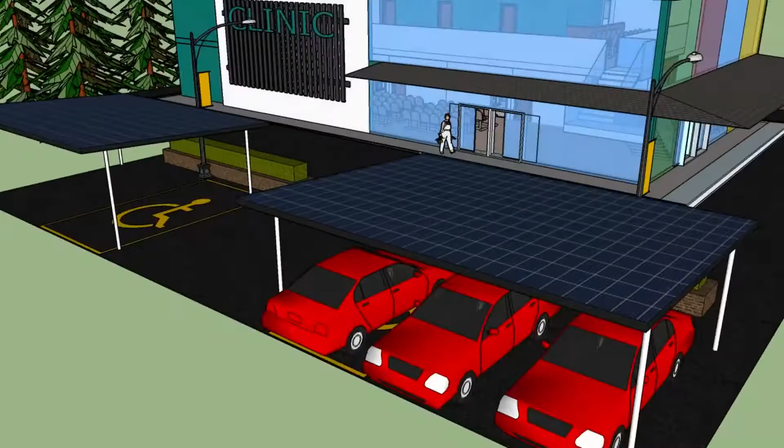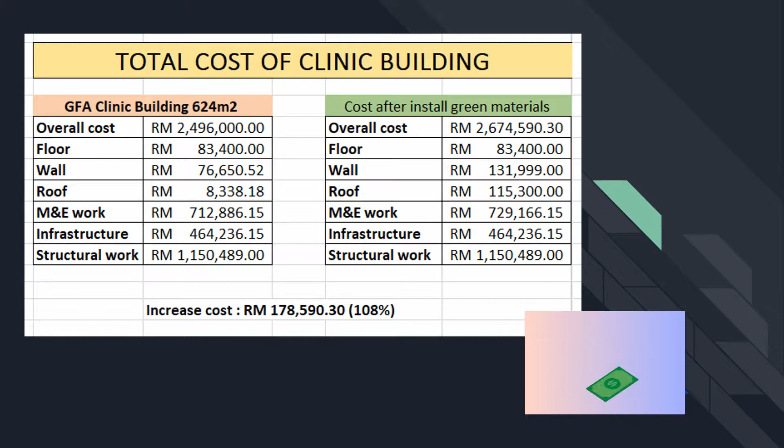The overall cost for our design building is RM 2.496 million. The cost we get is based on Arcadis 2019, where the range cost per meter squared is multiplied by the GFA. Hence, the range cost per meter squared we use is 4,000 ringgit, then multiplied by the GFA, which is 624 meter squared.

The cost will then be distributed to building elements such as floor, wall, roof, M&E works, infrastructure, and structural work. As we can see, the cost of the installed green materials will increase the overall cost. In our building, the overall cost of the installed green material is 2,674,590 cents. The elements that increase the cost are the wall element, roof element, and M&E work.

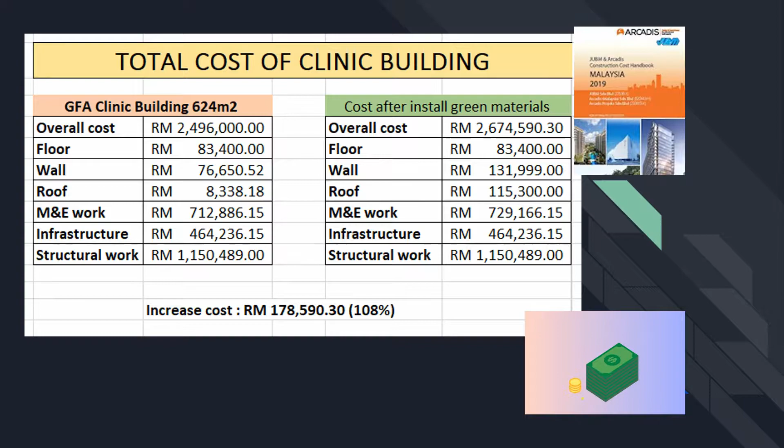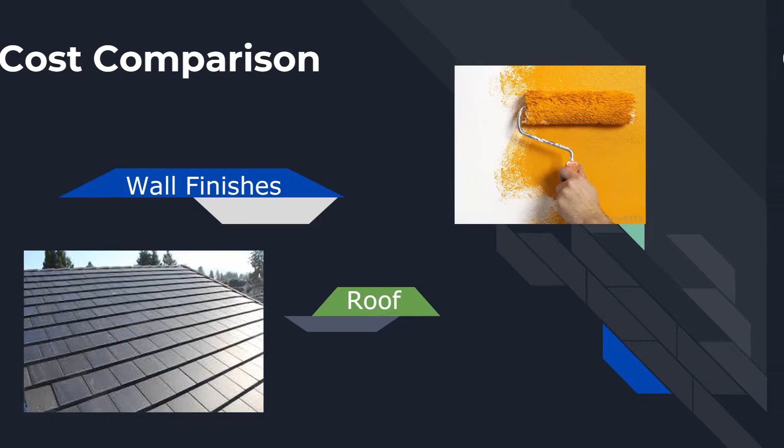We install green materials such as tubular skylight, solar panel, rainwater harvesting system, colored glass wall, low VOC painting for wall, clay brick for wall, exhaust fan for toilet, and sensor lighting. There are a few elements that we compare to make a cost comparison with the previous conventional clinic design, such as wall finishes, roof, glass wall, exhaust fan, tubular skylight, rainwater harvesting system, and bricks.

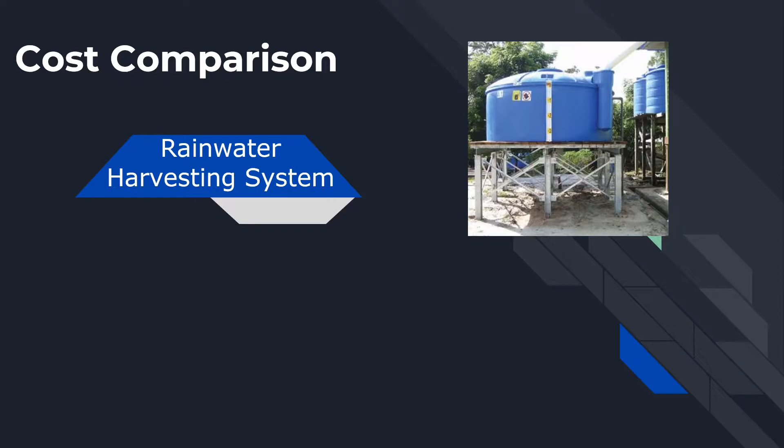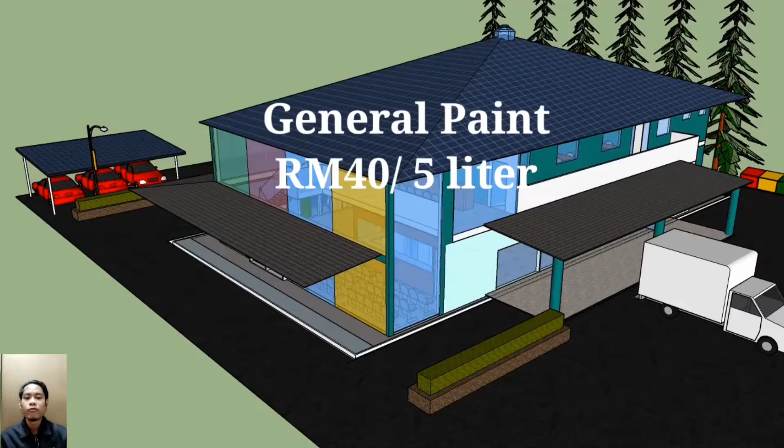Before this building converted to a green building, the finish for the wall was paint. Basically, the paint is a general paint in the market, which is for a general building. The price is RM 40 per 5 liters. For painting this building, we need to use about 140 liters, which is about RM

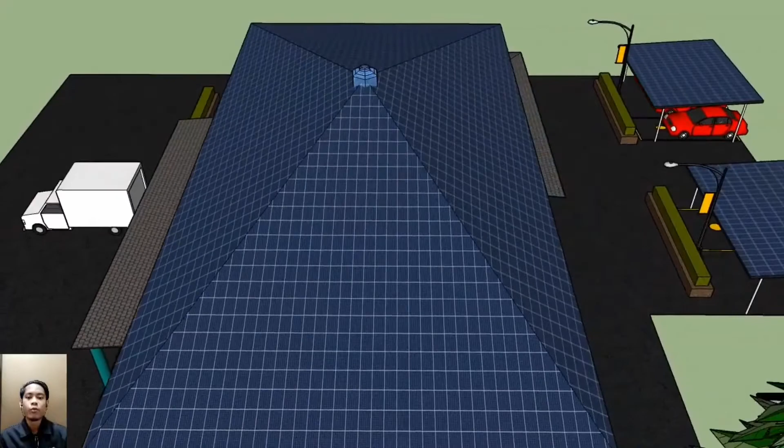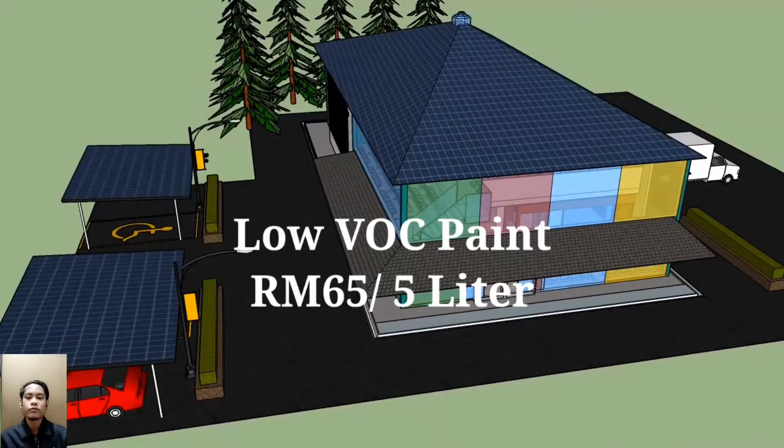1,120. When the building converts to green, the paint we use is low VOC paint, which is more expensive than general paint. The price is RM 65 per 5 liters. The total price for painting this building using low VOC paint is RM 1,820. The price difference is about RM 700 to convert the paint to a greener one.

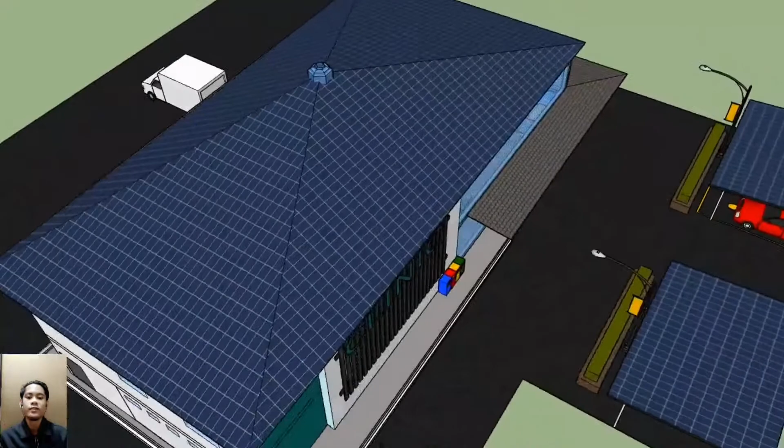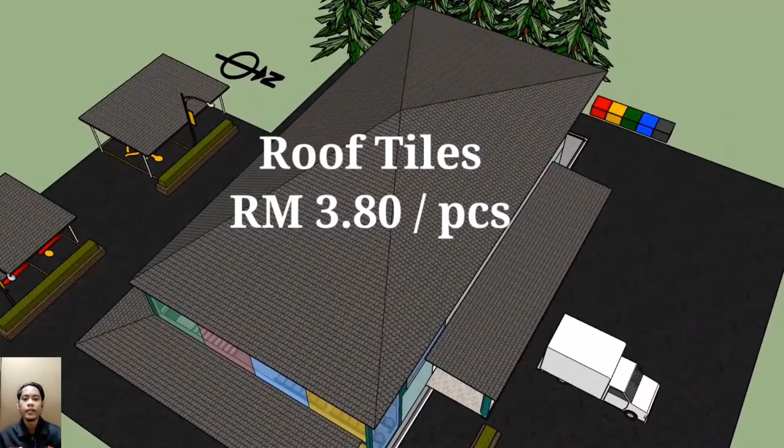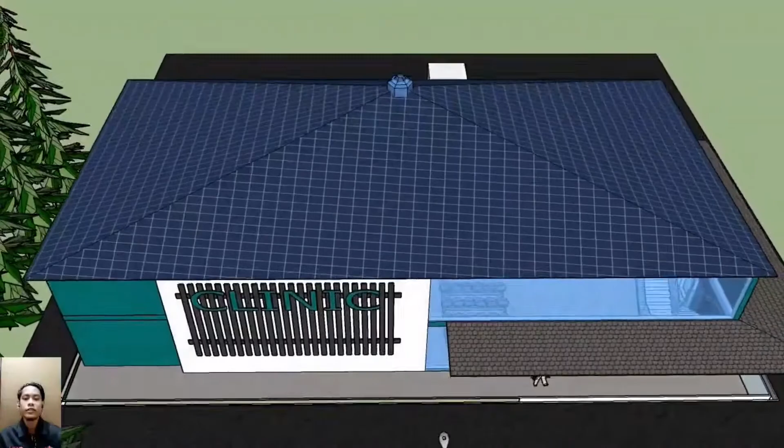The roof finish for this building uses roof tiles. The price for the tiles is RM 3.80 per piece with size 472 times 303 millimeter, which is about 11 pieces to cover a 1 meter square area. The roof size for this building is about 446 meter square. So it takes about RM 18,642 to install all the roof.

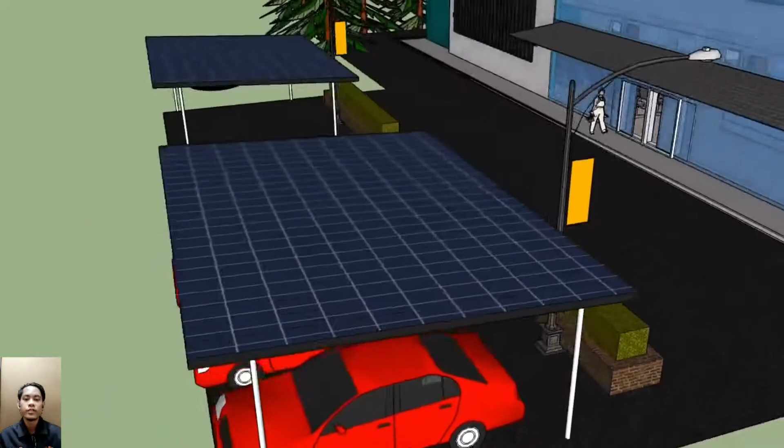When the building converts to a green building, we use solar panels as the roof finish. The cost for the solar panels as a roof finish is about RM 56,900, including batteries, wires, and inverter.

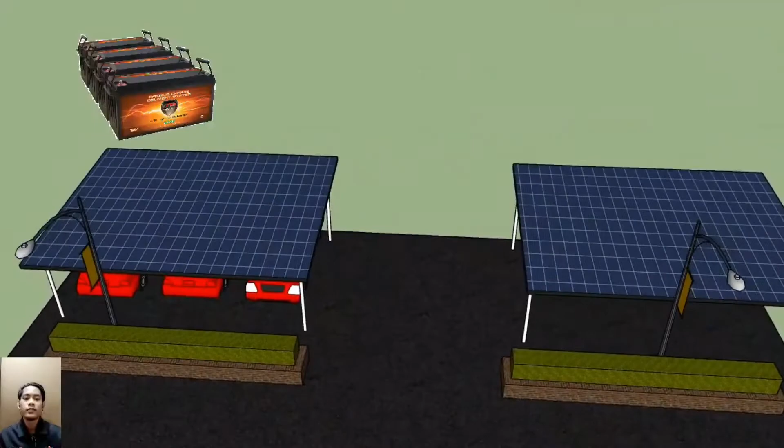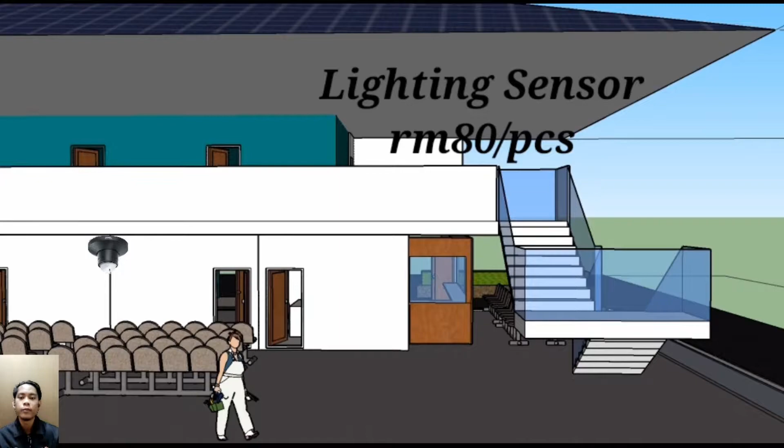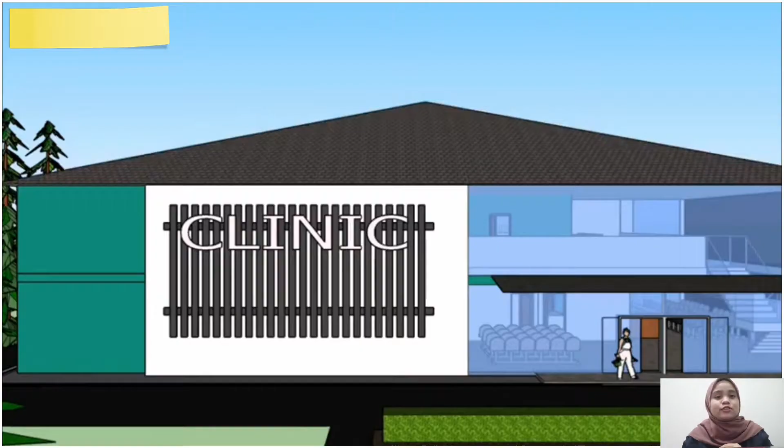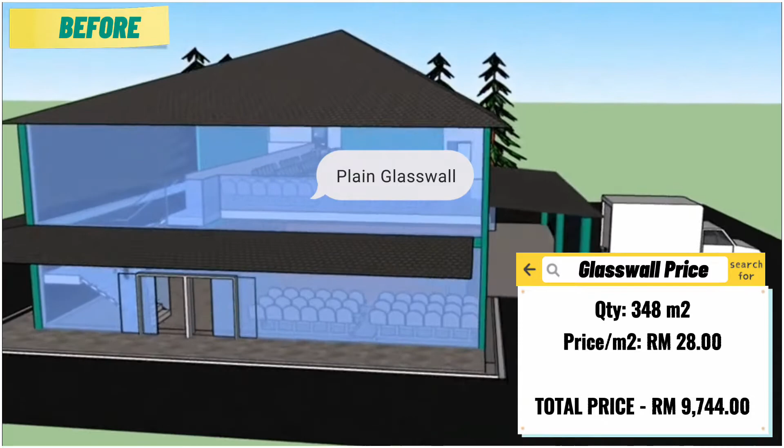As we can see, in our design building there will be a big glass wall. This is because a big glass wall allows maximum daylight to enter the building. When we are using the plain glass wall, the price will be 28 ringgit per meter square. With the area covered, the total price will be 9,744 ringgit. However, our design building is also proposed to be in a colored version.

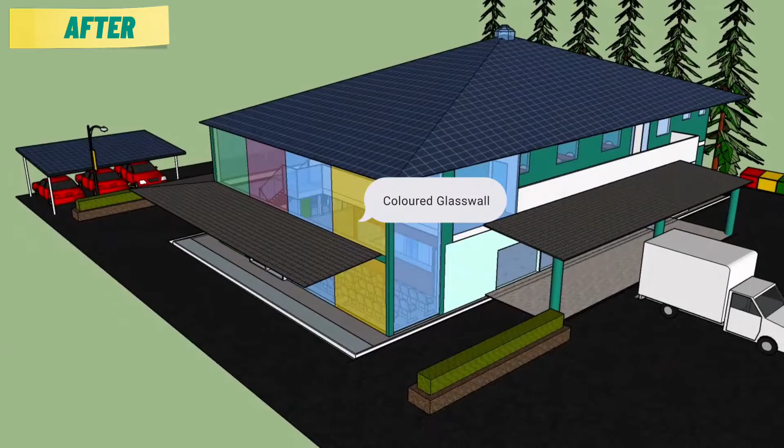In the colored version, it can at least block excessive daylight that can cause radiation to the occupants. This also acts as daylight glare control. In order to promote sustainability, for around 348 meter square we are using a colored version of glass wall. This will give a total of 12,180 ringgit, a difference of around 2,436 ringgit, at 11%, for this item.

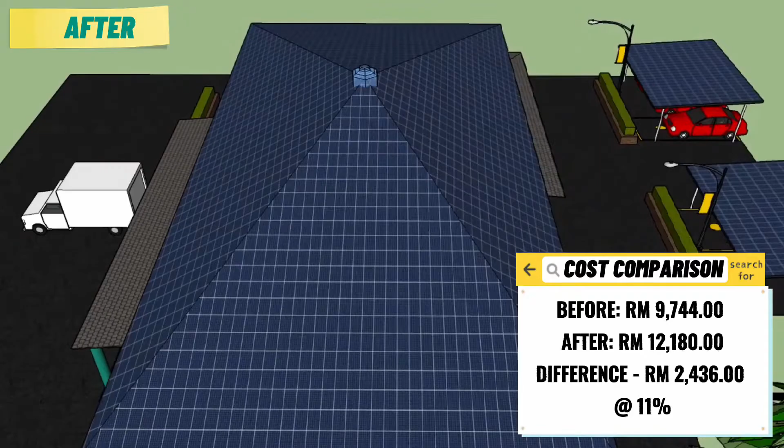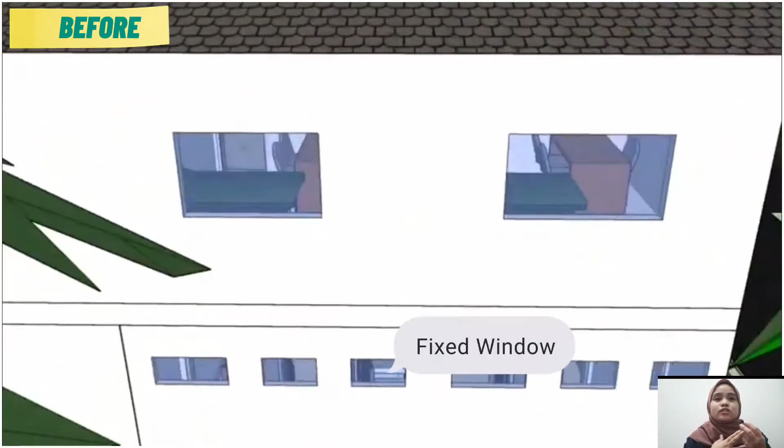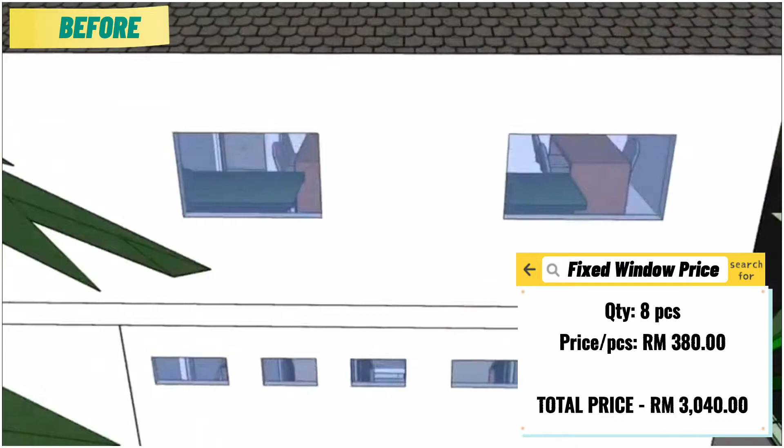For the next item, we are also upgrading the toilet area. As we can see, in the previous building we were using a fixed window to control ventilation for the toilet area. The fixed window costs 380 ringgit per piece. As we are using 8 pieces, it gives a total of 3,040 ringgit. This location is at the toilets on the top and bottom floors.

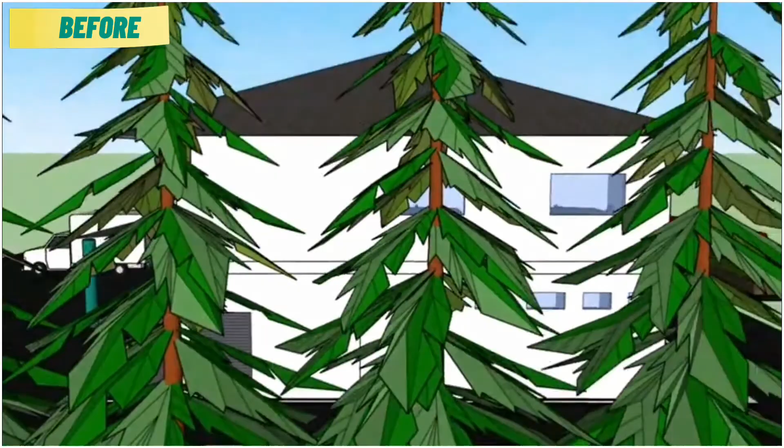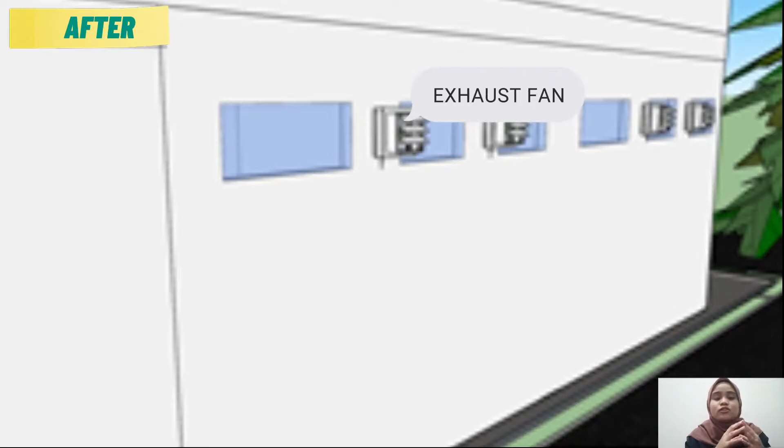Thus, in order to improve the ventilation part in this building, we also put the exhaust fan in the toilet area. This will enhance the airflow for the toilet area. In order to meet the sustainability, we change the fixed window to the exhaust fan.

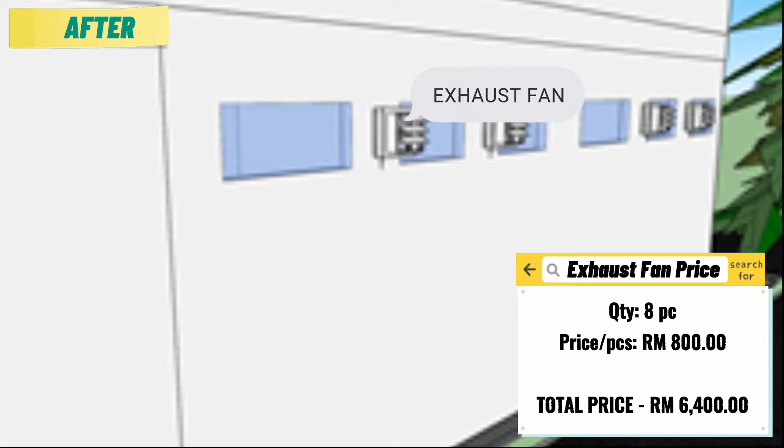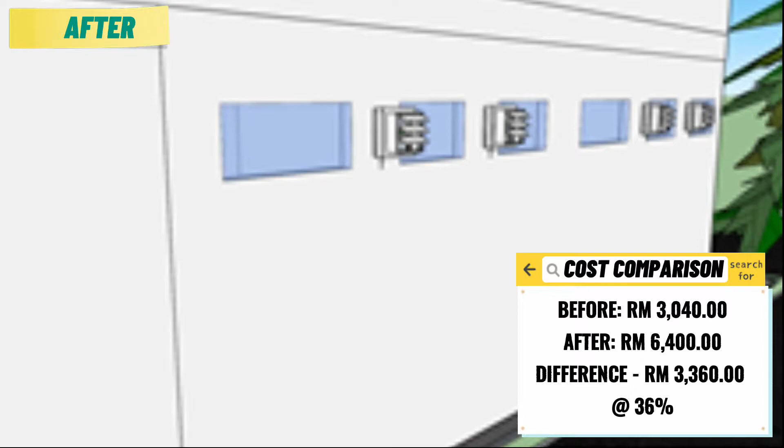The price for each is 800, so give a total around 6,400 for the exhaust fan. Thus, this will give a difference around 36% by changing it to the exhaust fan. This is like a one-off investment for a long term, as it will increase the sustainability and helps the building to become more green.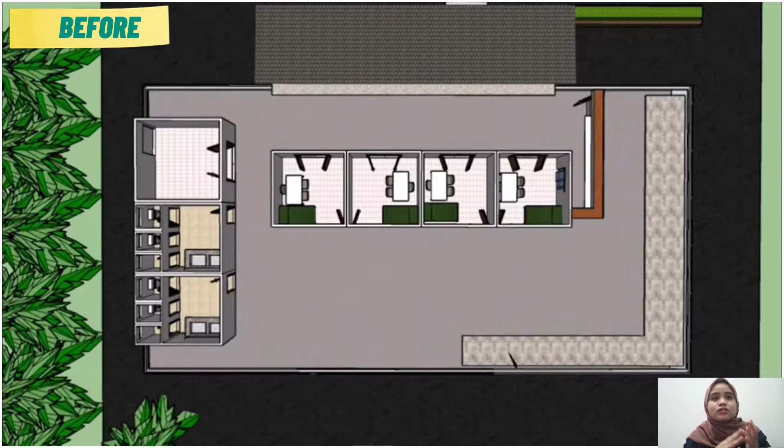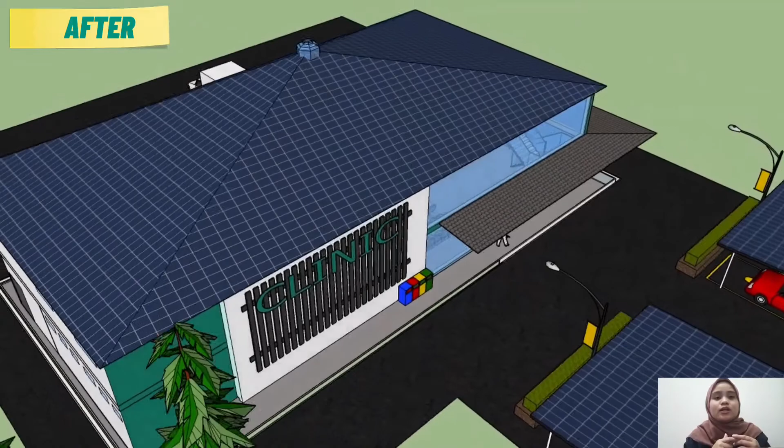For the environment part, as we can see in the previous building, we don't have any sustainable or green item for the roof part. So we proposed for the roof part in order to meet a more sustainable building. The element that we propose for our design building to become more sustainable is a tubular skylight at the roof part. We all know the function of tubular skylight is to capture the sun ray and transfer it to the indoor.

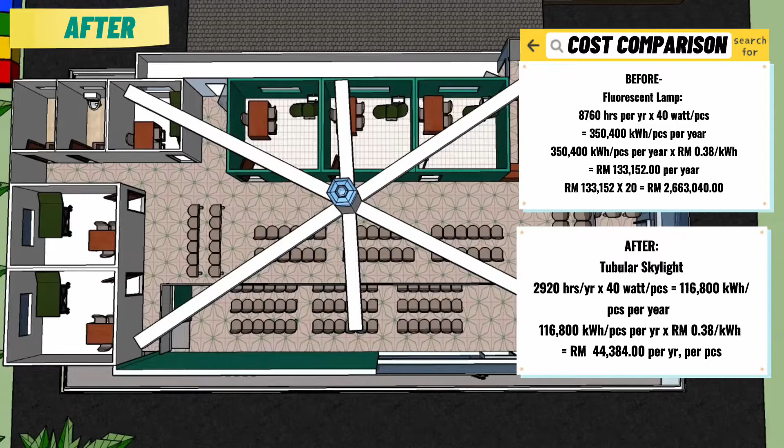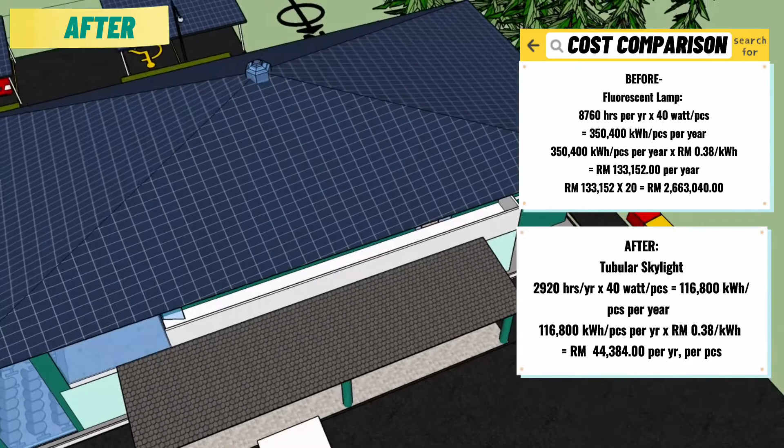The quantity that we use is 1 piece only, and this will give a total of 5,000 ringgit. Previously, when we decided to use fluorescent lamps, it will give 2 million 663,000 of the total cost per year. While if we change it to the tubular skylight for more sustainability and green, it will give a total around 44,000 only per year. So it is proof that tubular skylight is more efficient, cost saving, and more green and sustainable.

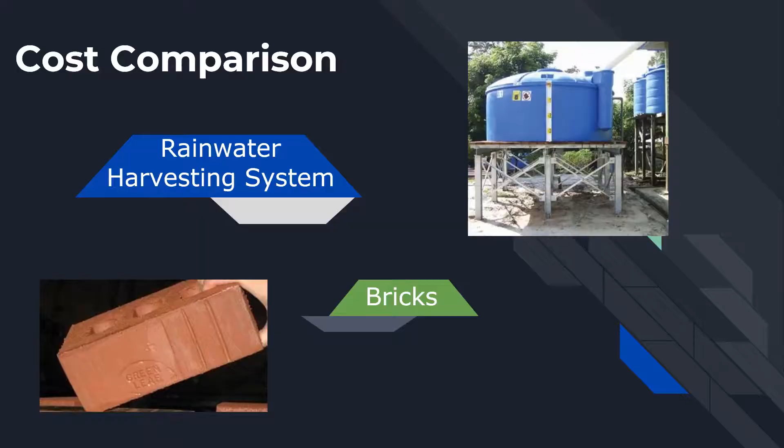For rainwater harvesting system, we installed a 5,000 liter storage of rainwater harvesting tank with a price of 10,000 ringgit per tank. There are 2 tanks. Each tank can store up to 2,500 liters of water, and the 2 tanks we installed outside of the clinic. As we can see, there are 2 rainwater harvesting tanks outside of the clinic.

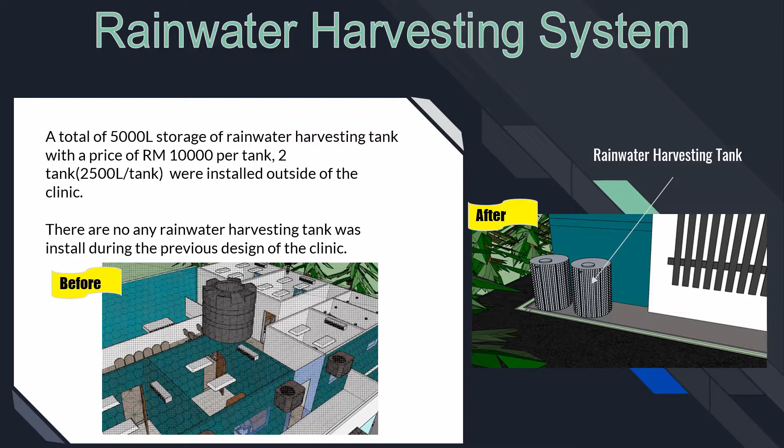For the previous design of the clinic, there was no rainwater harvesting tank in the clinic, there was only an ordinary tank of 5,000 liter storage of water located underneath the roof. For the water usage in the clinic without rainwater harvesting system, we assume 100 persons per day use the toilet, an average of 5 liters of usage per patient. So the annual usage of water will be 365,000 liters of water. Keep in mind that 1 meter cube equals 1,000 liters of water.

So the cost of water supply for a year will be 1,022,000. The amount of water needed to supply the whole clinic is 365,000 liters of water. An average annual rainfall in Peninsular Malaysia is 2,400 mm, so a total of 1,069,200 mm³ of rainwater can be collected in a year.

So we assume only 60% of the rainwater gets into the tank. That gives a total of 641,520 liters per year. An annual usage of water is 365,000 liters, so the rainwater collected is enough to give water supply to the whole clinic without having extra water supply.

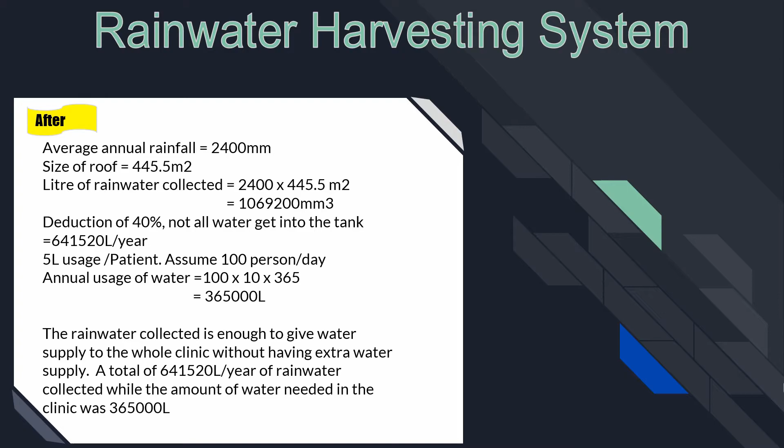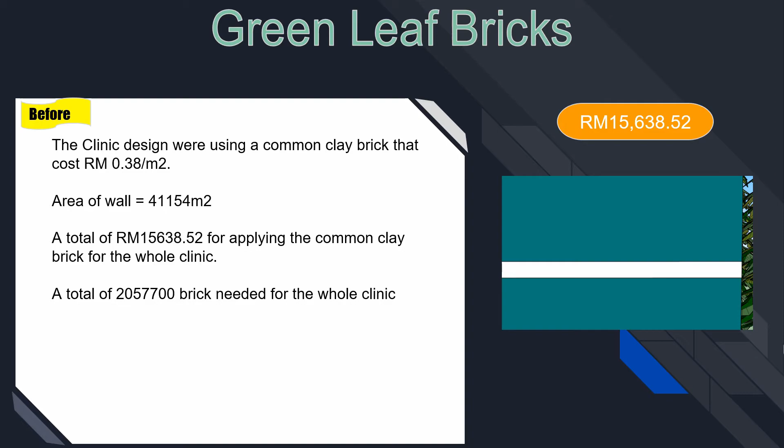The previous clinic design was using a common clay brick that cost 38 cents per meter square. The area of wall of this clinic is 41,154 meters square, so a total of 15,638 and 52 cents to apply the common clay brick for the whole clinic.

We use a green leaf brick that costs 1 ringgit and 50 cents per meter square. The area is 41,154 meters square, so a total of 61,731 ringgit to apply the green leaf brick for the whole clinic.

Next, the return of investment of the clinic can be achieved in the first year of operation, as it provides a 1.67% return of investment, and by the 5th year of operation of the clinic, the return of investment can be achieved up to 8.12% for the clinic.